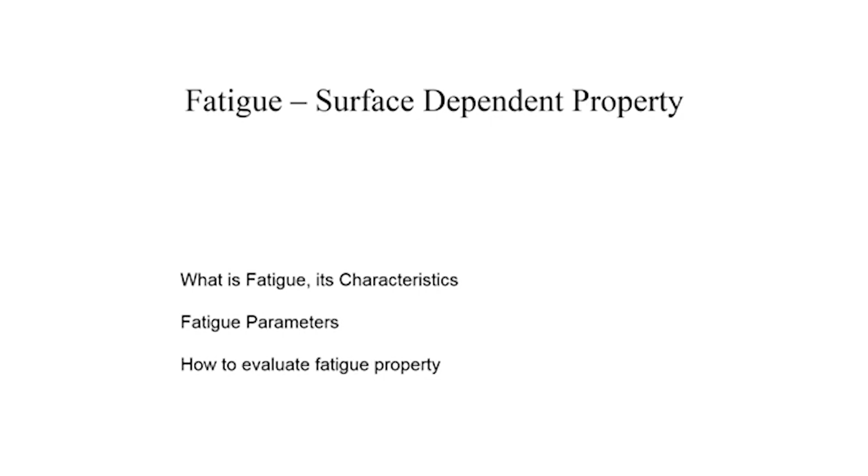Hello, in this talk I am going to discuss another important mechanical property of matter: fatigue. In this lecture, with a brief introduction to fatigue, I will discuss its characteristics, the parameters which influence fatigue, the way it is represented, how to evaluate fatigue properties, and finally the techniques to improve the fatigue properties of the material.

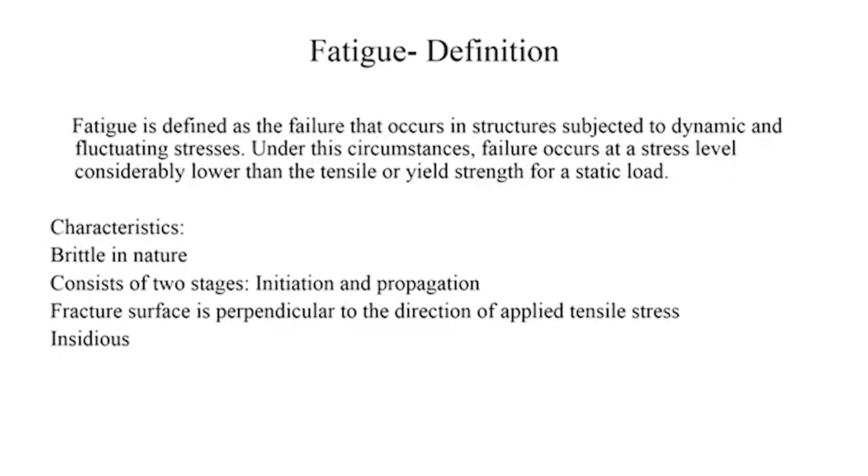Fatigue is defined as a failure that occurs in a structure which is subjected to dynamic and fluctuating stresses. Under these circumstances, it is usually observed that failure occurs at a stress level considerably lower than the tensile or sometimes yield strength of the material under static load.

If you go through the characteristics of this failure, it is a little different from failure of the material under uniaxial tensile loading. It is usually brittle in nature, consists of two stages - initiation and propagation - and the fracture surface is usually perpendicular to the direction of applied stress. It is insidious in nature, making it a very dangerous form of failure of the component in service.

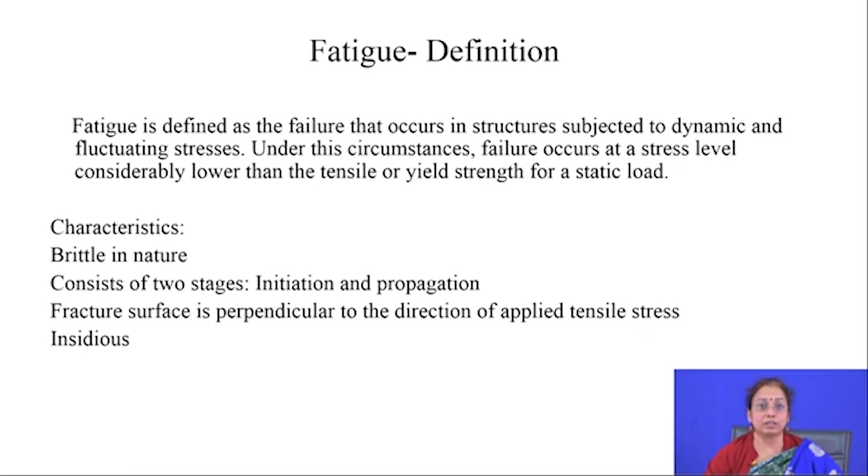If you go through cyclic stress under uniaxial loading, it is easy to define the stress level when the component works. But when cyclic stress operates on the surface or any component, you have to define the stress. Usually the cyclic stress may be axial in nature, flexural in nature, or torsional in nature.

If you go through the parameters to characterize fluctuating stress, it may be mean stress, which is the average of the maximum and minimum stress the component is subjected to. It may be the range of stress, which is the difference between the maximum and minimum stress. Or it may be the stress amplitude, which is range of stress divided by 2.

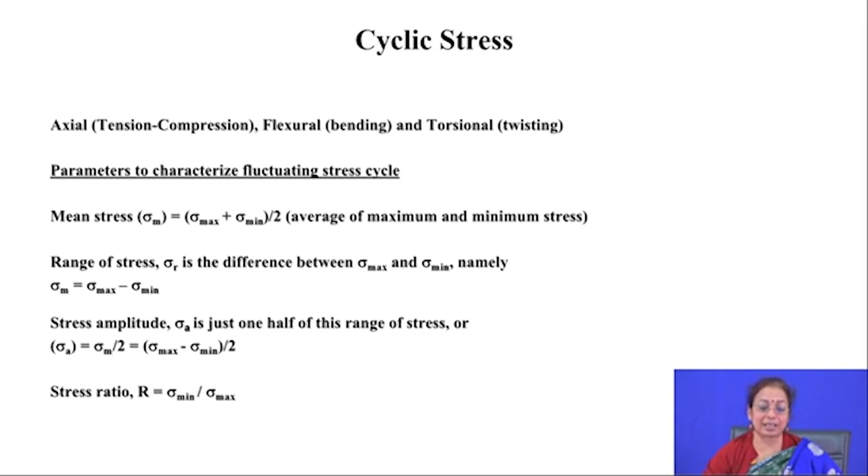It can also be stress ratio, which is the ratio between the minimum stress and maximum stress. So by these four parameters, cyclic stress is actually represented. Whenever you talk about cyclic stress, you have to talk about any of these parameters discussed.

Now, if you go through the way fatigue property is measured, it is measured by a typical testing method called rotating bending testing. In this test, you have a typical tensile specimen which is subjected to continuous rotating and bending operation.

When the component is subjected to loading, you will find that one part of the component is bent. One side is subjected to tensile loading and the reverse side is subjected to compressive loading. When you rotate this component, you will find the reverse phenomenon occurs.

The side which was subjected to compressive loading now faces tensile loading, and the other surface faces compressive loading. By this process, the same side of the component is repeatedly subjected to compressive and tensile loading, and the number of cycles to failure is recorded with the help of a counter, defining the number of cycles to failure for a particular stress level.

In this testing you need a large number of samples. You go on changing the cyclic stress with different values, and then find the number of cycles to failure under each cyclic loading operation, under each mean stress or under each stress ratio.

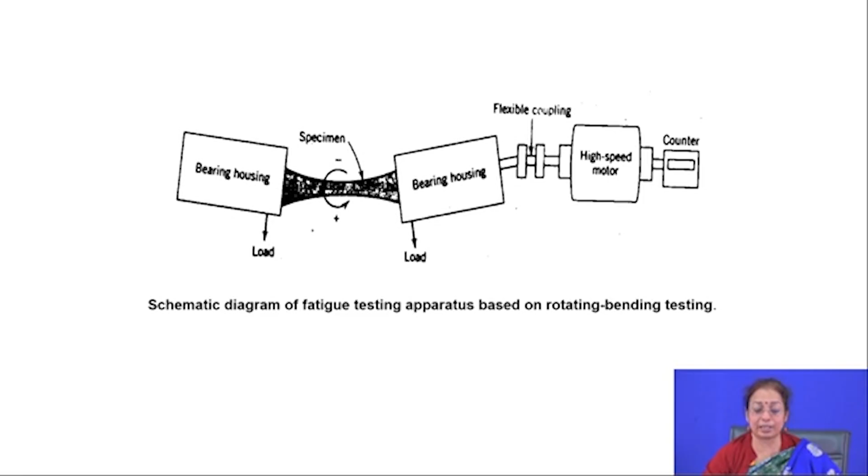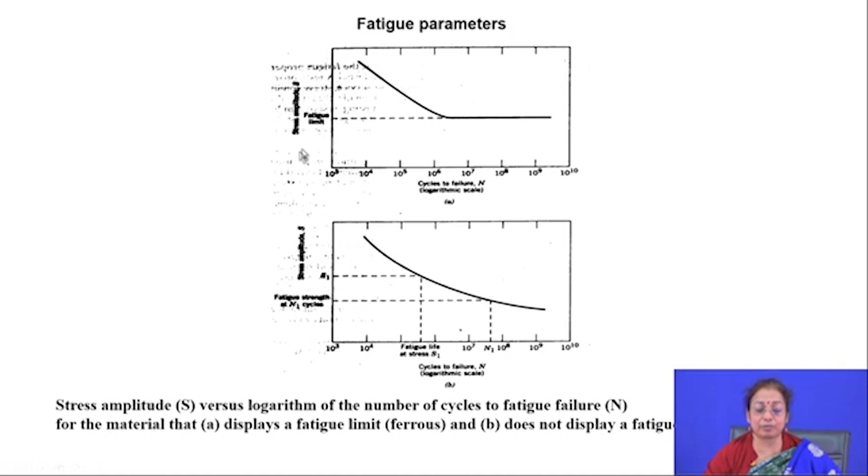And then you represent the fatigue properties in terms of cycles to failure as a function of stress amplitude, since stress amplitude is commonly applied as a parameter to define the cyclic stress.

If you go through the number of cycles to failure as a function of stress amplitude, you will find different kinds of behavior in ferrous and non-ferrous materials. This is a schematic representation of the fatigue behavior of ferrous material, and this is for non-ferrous material.

You will find that in ferrous material, when the stress level is below the fatigue limit - below a certain value of stress amplitude - there is no failure at all. So we call it the fatigue limit.

Fatigue limit is usually taken as a safe limit or safe cyclic stress at which the component can be applied very nicely. But when the stress amplitude increases above the fatigue limit, there is a chance of failure. So you have to use the component at a cycle much lower than the designated cycles to failure of the component under that particular stress amplitude.

On the other hand, if you quickly go through the fatigue behavior of non-ferrous materials, it does not have any sharp fatigue limit, but usually it is observed that as you go on decreasing the stress amplitude, the cycles to failure actually increases. So here you have to always define the typical stress amplitude, or say the number of cycles to failure at a particular stress amplitude.

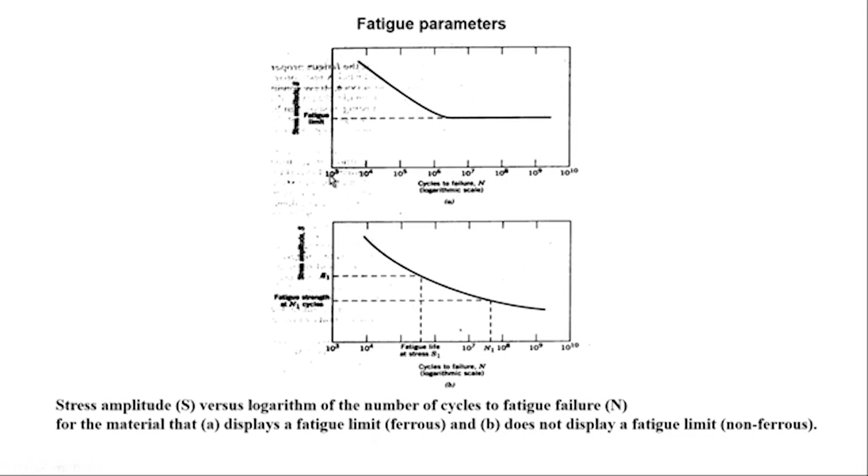So whenever you talk about the stress limit of the component, you have to always define the number of cycles to failure. So you use the component at a cycle much lower than the fatigue life of the component. These are the two important ways by which you basically define the fatigue properties of ferrous as well as non-ferrous materials.

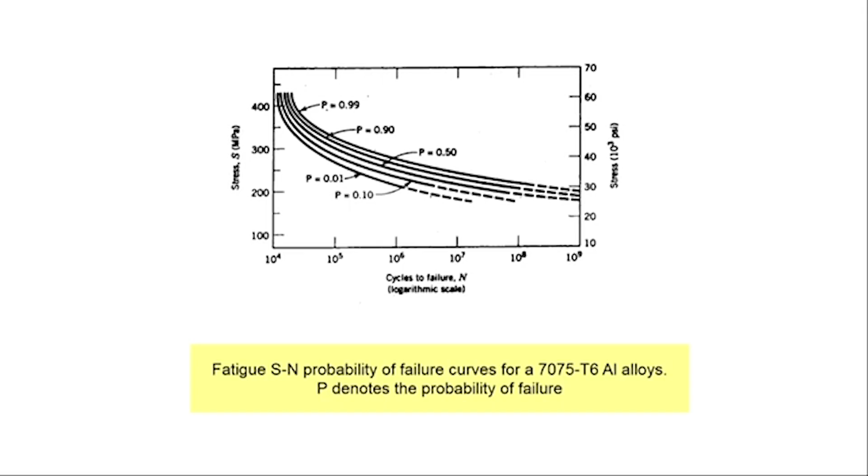You will find that when the probability of failure is 0.99, naturally the cycles to failure is much lower than when the stress amplitude is lower. So like that you can also define the fatigue behavior of the component through probability of failure. When probability of failure is negligible, you can use that particular material at that stress amplitude in a very safe fashion.

Now, if you quickly go through the stages in fatigue, you will find that fatigue usually proceeds in two, or you can say three stages. Stage 1 is crack initiation, and stages 2 and 3 are crack propagation stages. So there is stage 1, which people call crack initiation, and crack propagation stages, which consist of two stages, stage 1 and stage 2.

If you quickly go through the reason behind crack initiation, you will find it is because of the presence of impurities, presence of imperfections on the surface, defects on the surface, and stress concentrations at the surface. So impurities, defects, and stress concentrations at the surface are responsible for crack initiation.

As I was mentioning, fatigue is very much dependent on the surface. This is because fatigue crack initiation depends on surface imperfections. So if you prepare a surface free from any flaws, imperfections, impurities, and free from stress concentration points, you can always improve the fatigue life of the component.

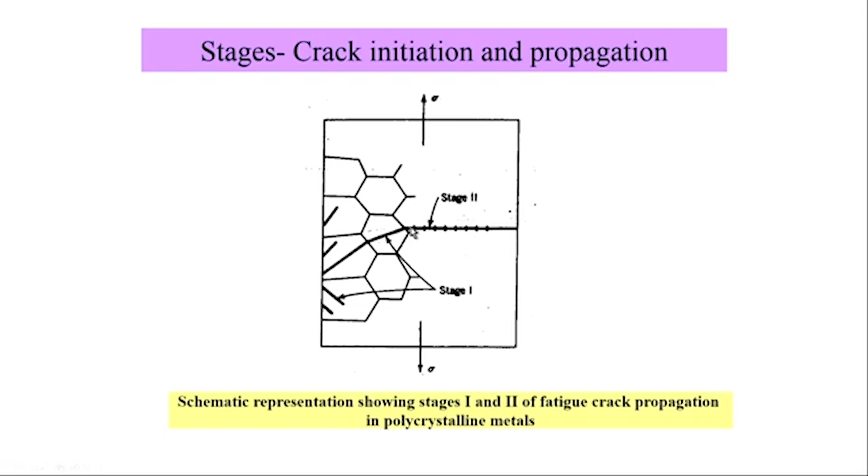On the other hand, when the crack length increases and exceeds the critical crack length for failure of the component, the crack proceeds at a much faster rate—that is stage 2 crack propagation. It is very difficult to control. Stage 2 crack propagation rate depends on the fracture toughness of the component, so by any surface treatment you cannot control or prevent stage 2 crack propagation.

This is very important to note: if you want to minimize or improve the performance of the component under fatigue loading, you have to improve the surface very nicely so that there are no imperfections, no inclusions, no stress concentration points at the surface. Otherwise, you harden and toughen the surface so that stage 1 crack propagation rate reduces to a large extent.

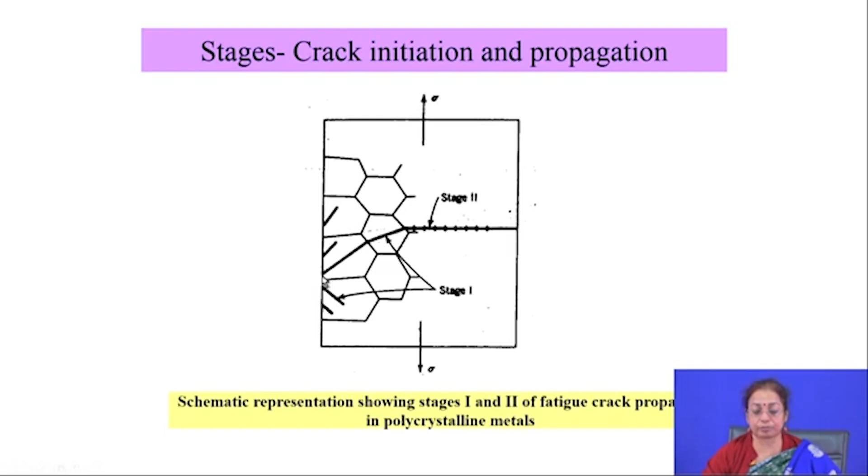Now, quickly going through stage 2 crack propagation: this mechanism works by repetitive crack tip plastic blunting and sharpening. So once stage 1 crack propagation occurs...

...it creates a crack with length near the critical crack length. Then when subjected to repetitive compressive and tensile loading, tensile loading causes crack widening and subsequent plastic blunting, while compressive loading causes closure of the crack, and then again widening.

So stage 2 crack propagation consists of 3 stages: crack widening during tensile loading, plastic blunting, and closure of the crack during compressive loading. Through this process the crack advances by one unit step.

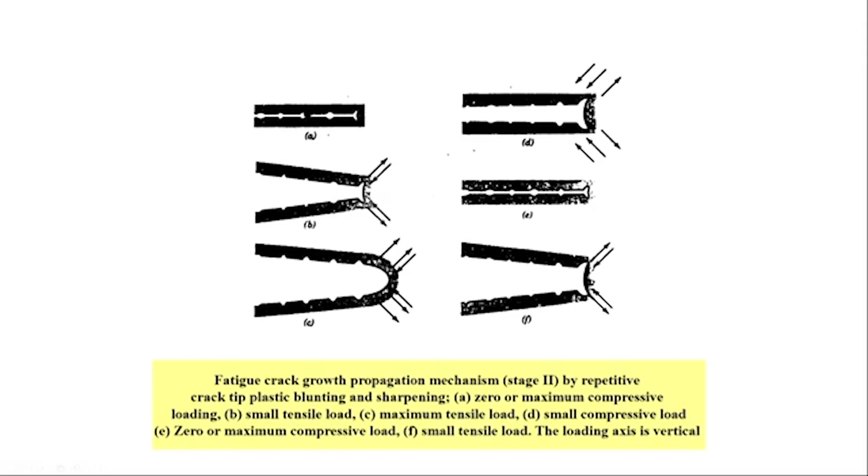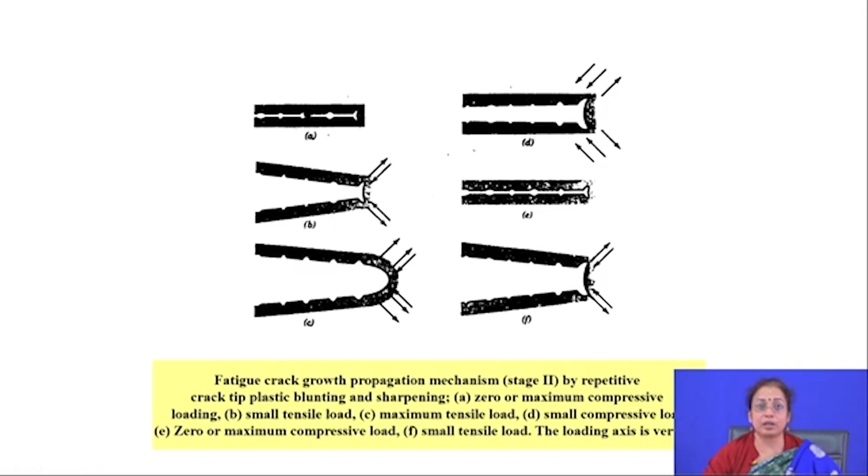So it is very important that when you apply compressive loading, there is a closure phenomenon. Compressive stress is not really harmful for crack propagation, but tensile stress is very harmful, and in most cases crack propagation occurs during the tensile component of the loading.

Now, if you quickly go through the characteristics of fatigue failure, it is very important to know the characteristics of the failed component so you can understand the reason for failure and get preventive measures so the component does not fail in service. The characteristics of a failed surface of a fatigue-failed component include a lot of beach marks, small...

...bands on the surface, like sea beach marks. When air blows on the sea beach, you find blowing marks, a beach-like pattern. Because of this appearance, it is called a beach mark, and there are also crack initiation points which are observed.

Final cracking points are also visible. So there are 3 important features: crack initiation points observed, beach marks observed, and the failure zone also observed in the failed surface.

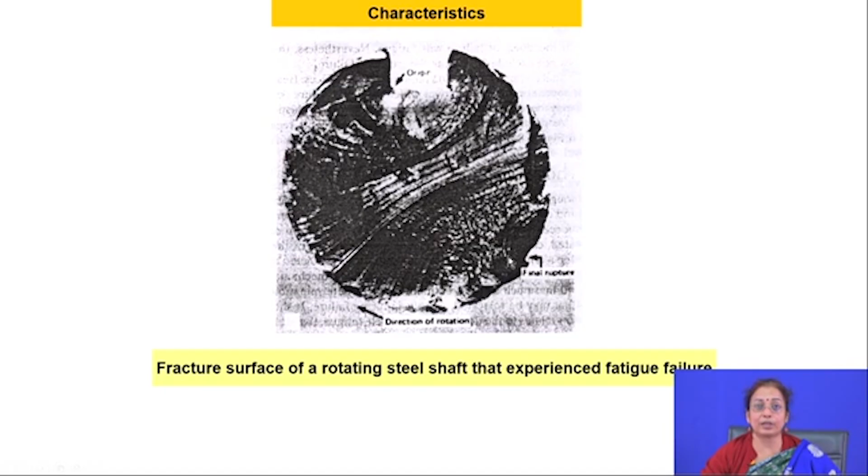Now, if you quickly go through the beach mark at very high magnification, particularly through TEM observation, you will find very fine striation bands in the beach mark, and this striation band length is basically...

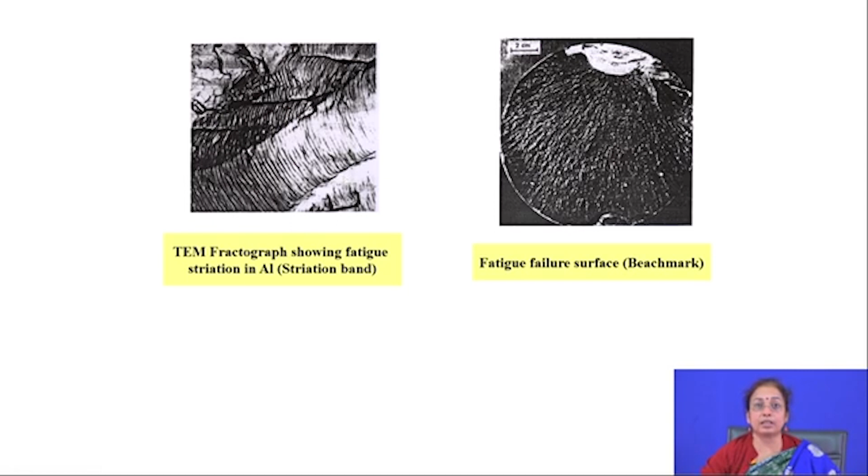...the unit length that the crack propagates during the tensile loading of the component. This is a typical repetitive phenomenon and is very much dependent on the component, the amount and magnitude of load the component is subjected to, and also dependent on the microstructure and composition of the component.

Now, if you quickly go through crack length as a function of number of cycles to failure, you will find that the rate of crack length propagation with number of cycles is very much dependent on the stress amplitude the component is subjected to. As the stress amplitude increases, as the cyclic stress amplitude value increases...

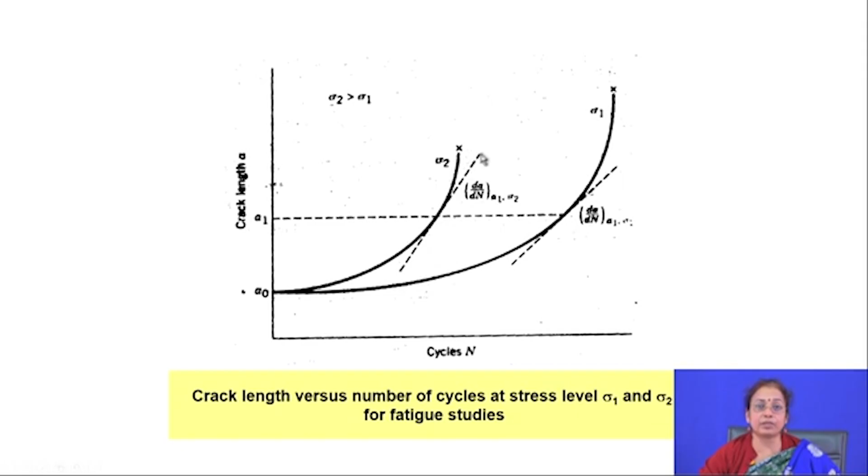...you will find that the rate of crack propagation also increases. So the rate of crack propagation, or the fatigue life of the component, is very much dependent on the stress amplitude value, to a large extent.

So, if you can reduce the stress amplitude by that process, you can reduce the crack propagation rate as well. Let's quickly go through the parameters which control the crack propagation rate, where A is the crack length and N is the number of cycles to failure.

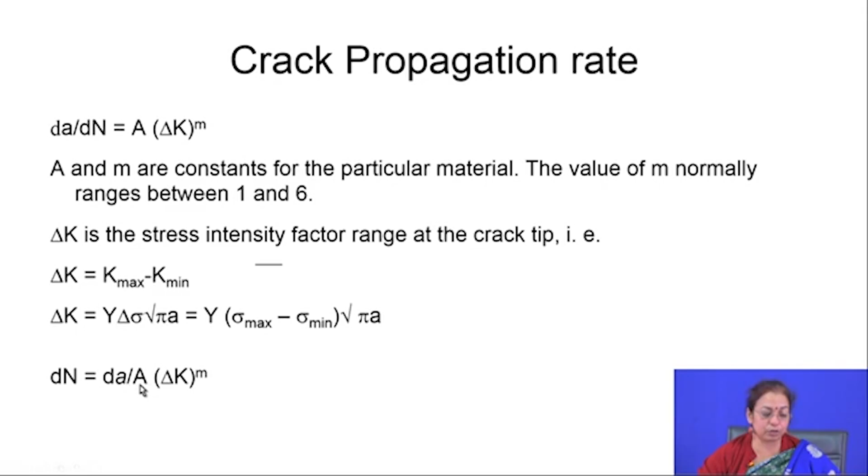So dA/dN can be stated as a typical constant, and del k is nothing but the stress intensity factor range to the power m, where m is a constant, usually 1 to 6 for metallic materials. Del k is the stress intensity factor range, which is k max minus k min, and is dependent on the yield strength, the Young's modulus of the material, the stress range, and the crack length. So finally, if you derive the term, you come to dN/dA equal to 1 over A del k to the power m.

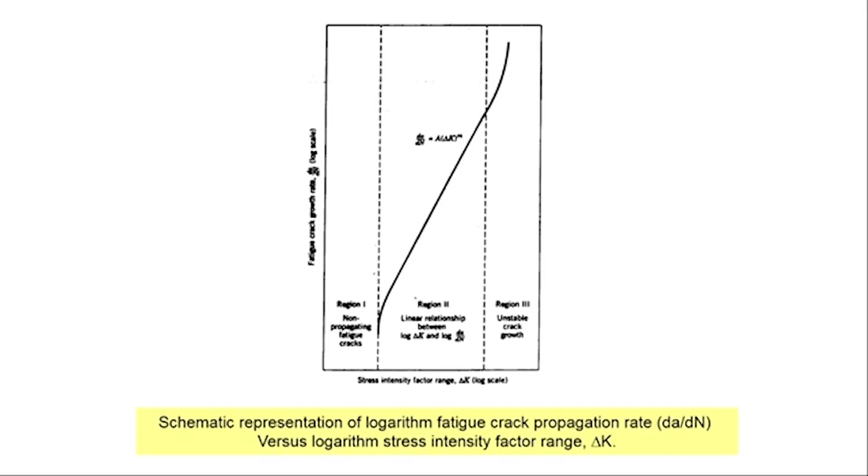If you plot the fatigue crack growth rate as a function of stress intensity factor on a log plot, you will find 3 regions. Region 1 is where there are non-propagating fatigue cracks, region 2 shows a linear relationship between log del k and log dA/dN, and region 3 is unstable crack growth where it is very difficult to control the crack propagation rate. Usually it is safer to use the material in region 1, where fatigue cracks cannot propagate. So this is a very useful plot to determine the service stress intensity range, or the fatigue limit, dictating the stress range at which the component should be used.

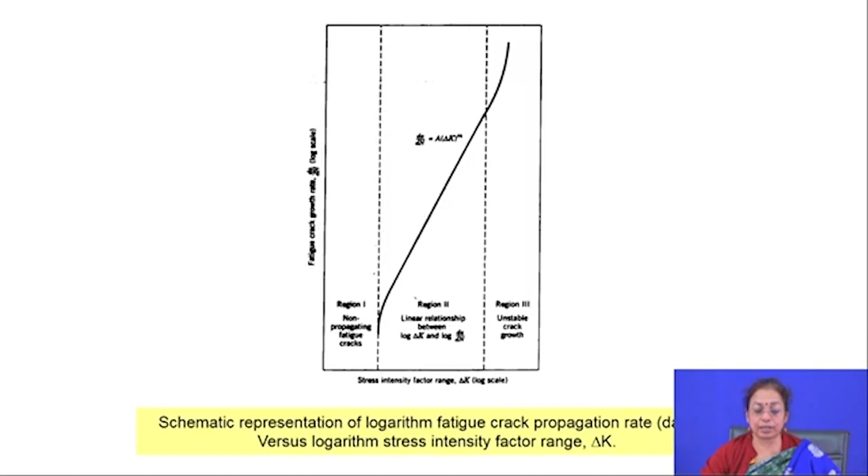Now, in summary, it is very important that you concentrate on the surface in order to improve the fatigue life of the component.

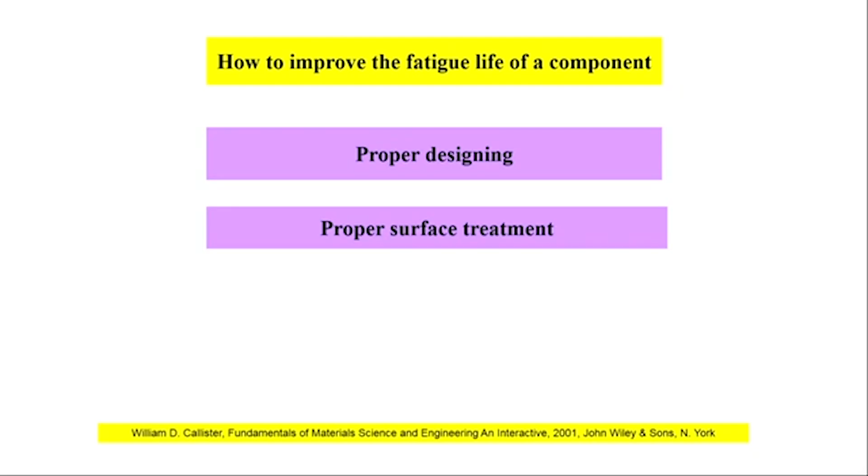But in most cases, particularly for a component in service, if you have to design for improved fatigue life, usually it is done by proper designing. The key point is to avoid typical stress intensity points where there is a chance of stress concentration. This is done by proper designing of the component - usually you should avoid sharp points or corners, making them a little smoother, avoiding areas with change in curvature. By that process you can improve the fatigue life.

You can also improve the fatigue life by proper surface treatment. The important surface treatment techniques try to avoid points of stress concentration, reduce the roughness of the component, and reduce imperfections on the surface, lowering the stress level on the surface. This is done by proper polishing operations, including electropolishing, using polishing operations that do not create much stress on the surface.

You can take care of stage 1 crack propagation by typical surface hardening operations. When you talk about surface hardening, you have to think of toughness as well. Usually several surface hardening treatment processes are available. Some surface treatment processes basically take care of hardness enhancement but do not bother about toughness. For example, titanium nitride coating on titanium or chromium nitride coating on steel - in that case, though hardness is increased, the layer is not really tough.

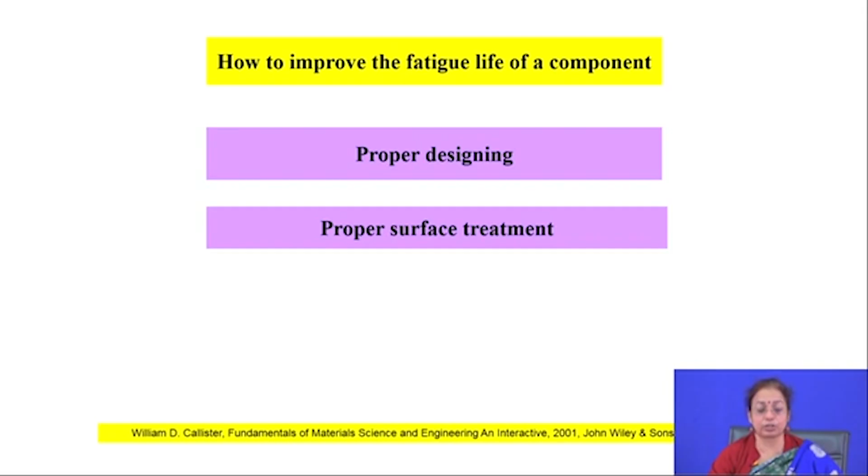If you quickly go through the stages in crack propagation, particularly stage 2 crack propagation, you saw that it consists of repetitive crack widening, plastic blunting and then closure of the crack. Closure usually occurs when compressive stress is acting on the component, so compressive stress is beneficial in improving the fatigue life of the component. If you introduce compressive residual stress on the surface by any technique, you improve the fatigue life of the component.

Compressive residual stress is usually applied by different methods like shot peening, laser shock peening, low plasticity burnishing operation, and deep cold rolling processes. These techniques are widely applied for introducing residual compressive stress on the surface.

In shot peening operation, you impact thin shots made of steel or ceramic materials, sometimes spherical balls, onto the surface at a certain velocity. This introduces a lot of compressive residual stress on the surface, but the main problem is that it introduces nano or sometimes micro deformation on the surface. So after shot peening, you have to be careful about the appearance of the surface. But it is a very good technique because it takes care of the fatigue property as well as cleans the surface to a large extent.

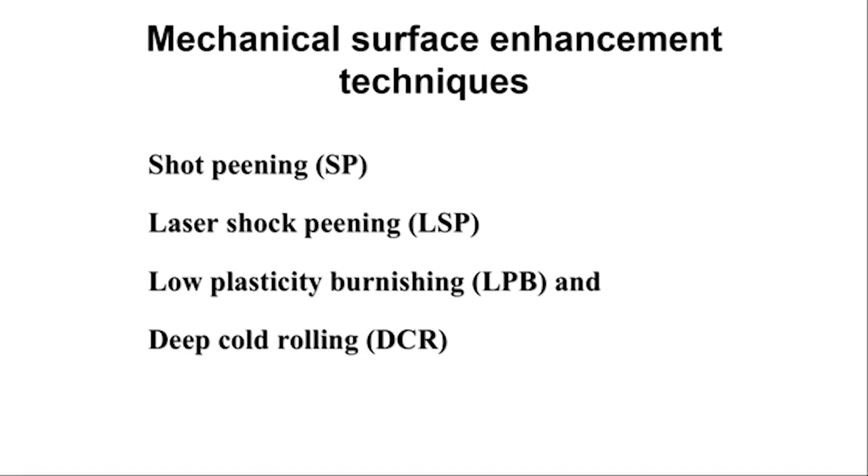Usually if you apply shot peening after carburization, or flame hardening, or induction hardening operation, this is beneficial, because by flame hardening, induction hardening or carburization there is formation of a very thin oxide layer and the surface is not so clean. If you apply shot peening, it cleans the surface to a large extent, and in addition there is also introduction of compressive residual stress on the surface. So this process is very much beneficial in improving the fatigue life of the component.

Laser shock peening is another interesting process, where a high powered, high energy density pulsed laser beam is irradiated onto the surface of the component. This causes ablation of the material from the surface, and the energy density is so high that the ablated gaseous species convert into plasma. That plasma applies pressure on the surface of the component, and that pressure causes compressive residual stress to be introduced. This is called laser shock peening.

The operation can be conducted in air, in water, or by application of a very thin black painting on the surface. If the surface is covered with water or black painting, it minimizes the probability of ablation of material from the surface. Instead, there is evaporation and plasma formation from the media, maybe water or ink, and that evaporated material forms plasma which applies pressure on the surface.

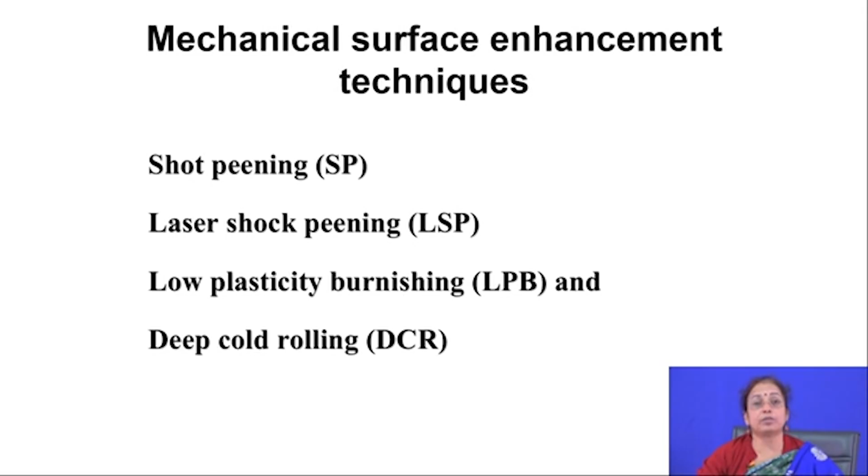Usually when you do carburization or nitriding, a very thin hardened layer is formed, and that layer is harder than the pure metal. So it increases the hardness and also the fatigue limit of the component. These are different ways you can improve the fatigue property of the component.

In summary, we can say why fatigue is a surface dependent property, mainly because it initiates from the surface, and also a few layers from the surface, after a certain depth, the fatigue failure can be controlled if precautions are taken.

Particularly by application of residual compressive stress or by application of different hardening techniques, the fatigue crack propagation stage is controllable, and also the layer has to be tough. So because of these two reasons, fatigue failure is actually a surface dependent failure.

We also discussed the stages of fatigue failure: stage 1 and stage 2. In stage 1 there is crack initiation, in stage 2 there is propagation. Stage 2 again consists of two different sub-stages: in the first, crack propagation rate is very slow, and in the second it is quite fast in nature.

We discussed the characteristic features of fatigue failure: usually beach marks, crack initiation sites, and crack propagation sites are three important characteristic features of fatigue failure. It is very important to know these features, because in service, failure occurs due to a large number of reasons.

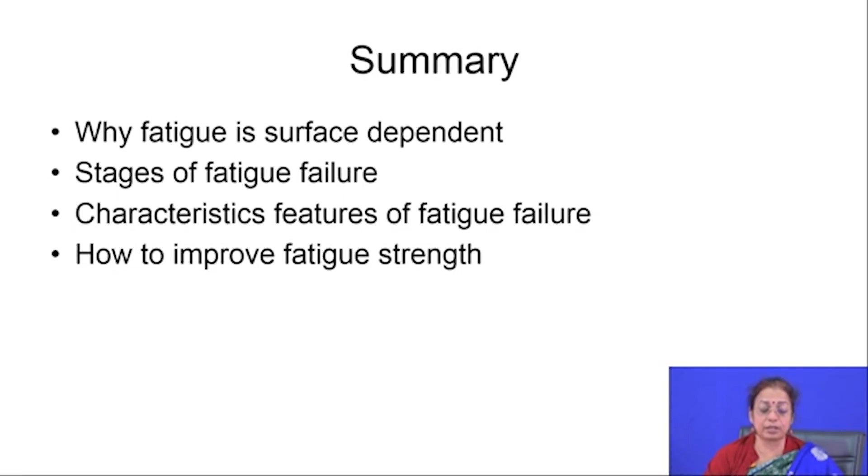You can also improve it by introducing compressive residual stress in the component, which is a very easy and quick technique to improve the fatigue strength of the material. Thank you very much.